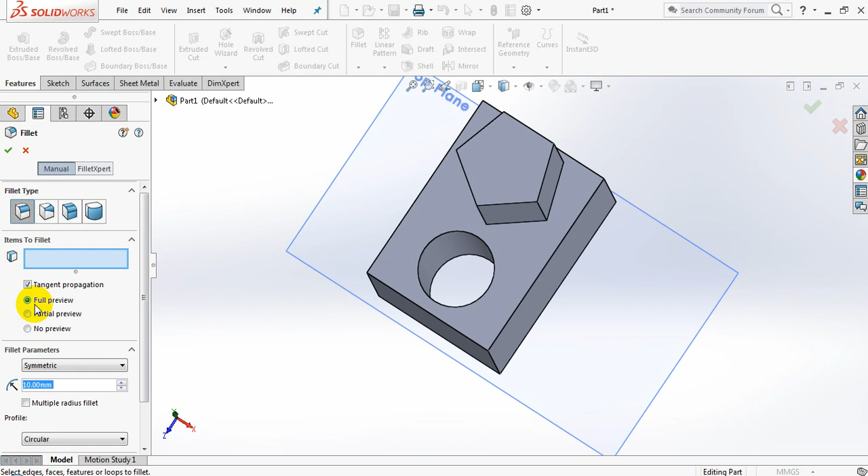Okay, I'd like to select full preview so I can see what my image is going to look like after the fillet. And let's see what this actually does. Items to fillet, you'll see that that is actually highlighted in blue. So let's go and select areas or lines to go fillet. I click on that line, you'll see it adds it to that list over there. It's edge 1. And you have a full preview of it as well.

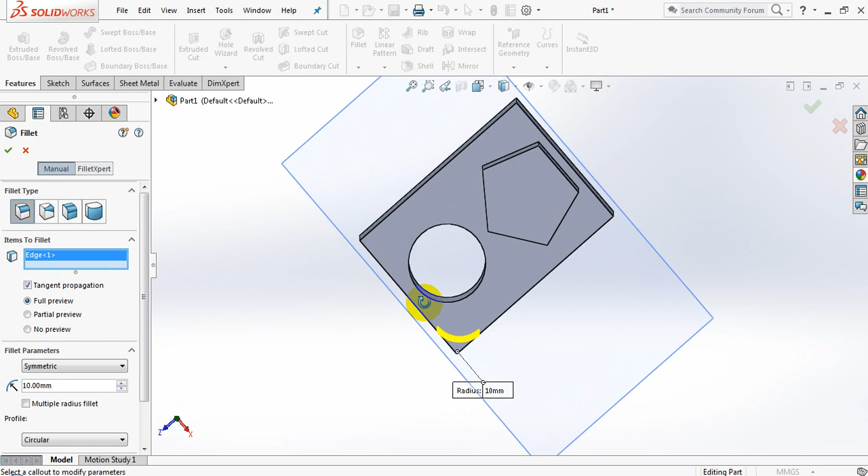Let's quickly swivel this around a bit. You'll see that it'll give you a preview of what it's going to cut off or fillet as such. Right, there it is there. I'm going to do this one as well. That corner there and this corner over here. Alright, so that's basic. If I'm happy with it, please note I've got all those edges lined up over here. I can do a partial preview, I can do no preview, or I can do a full preview.

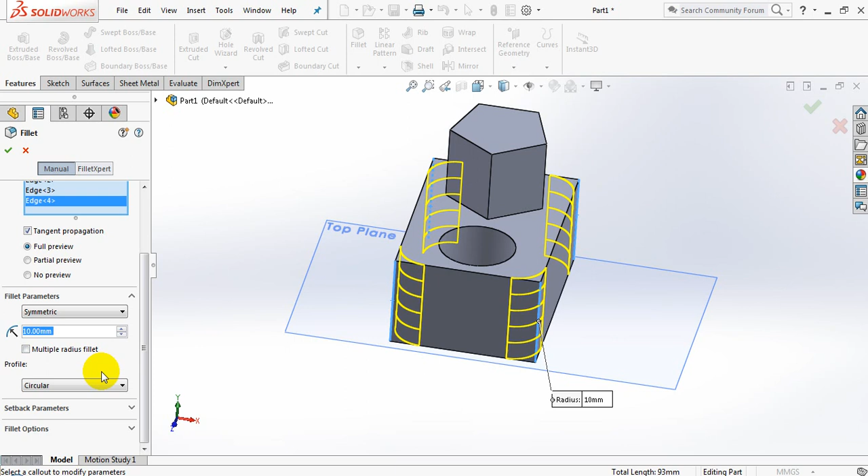In this case over here, I want a symmetric fillet parameter, or I could have an asymmetric fillet parameter, which means I can put two values in, and the same value won't apply to all four at the same time. So I'm going to just stick to my symmetric one, and I'm going to play around with 20, and you'll be able to see that it increases the size of the fillet. Alright, let's try 15. That looks decent.

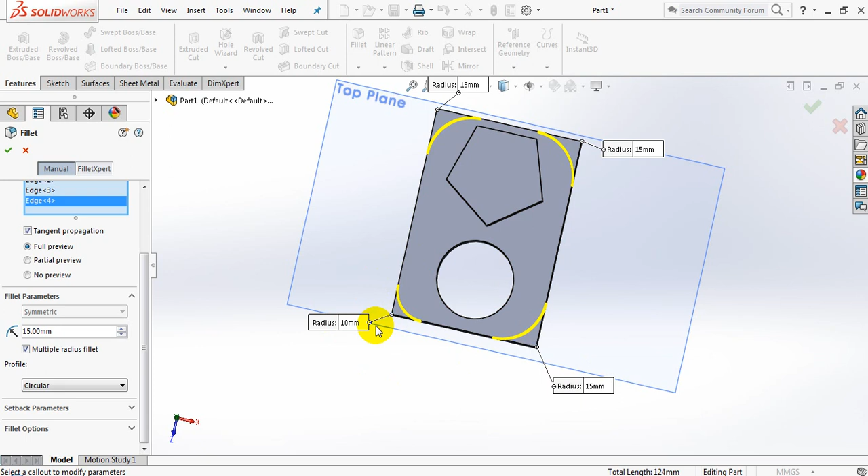I've got multiple radius fillet I can choose, and I can go ahead and edit this one at a time. Okay, I can make them separate sizes. So if I make this one 10, you'll see it'll be the only one that is 10, but I don't really want that. Okay, when I untick that, that jumps back into place. Okay, so I'm happy with that.

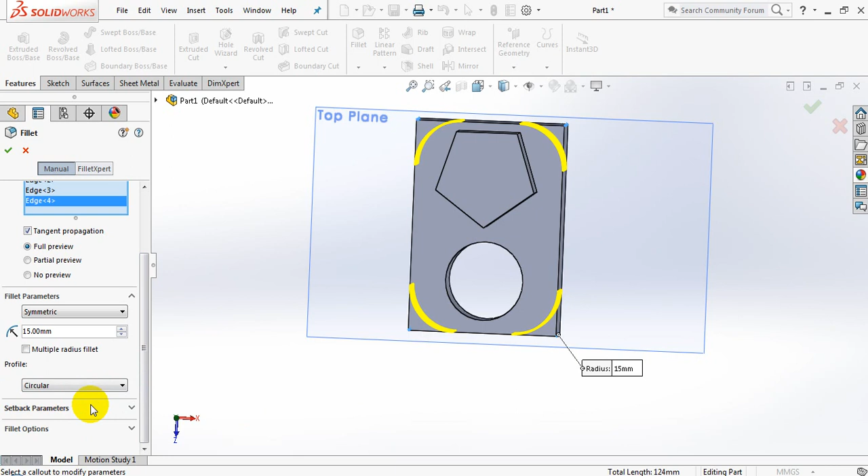They don't have to be circular, so let's just see from the top yet again. If I change this to conic rho, you'll see how it changes, and I'll be able to go and change the actual parameters of that as well. I can go ahead with conic radius. Yet again, I can change the radius of that, and curvature continuous. I can go and select that as well, but I'm going to stick with circular. Alright, let's select OK. And straight away it edits my actual shape.

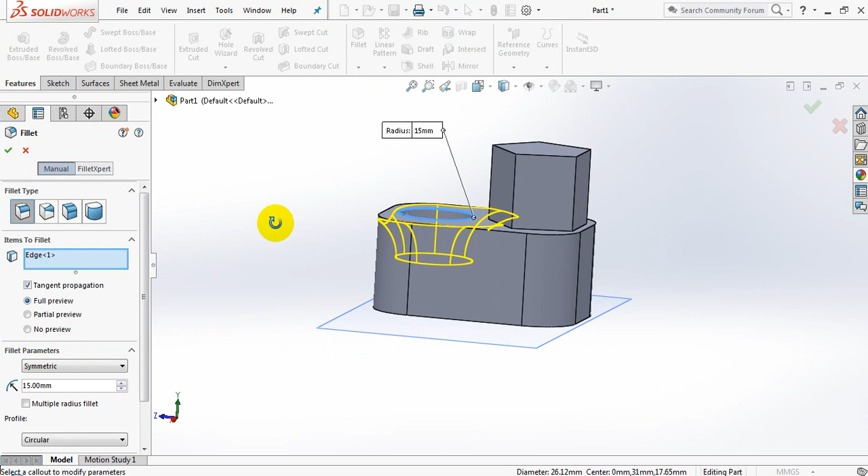Alright, I would also like to quickly show you this one over here. If I selected this profile, I want to go click on fillet. Remember, it has to be highlighted in blue. Automatically it goes and gives me a nice little presentation of what it would look like, and if I do like it, I'm going to go and click on the green tick, and it's going to fillet those edges for me.

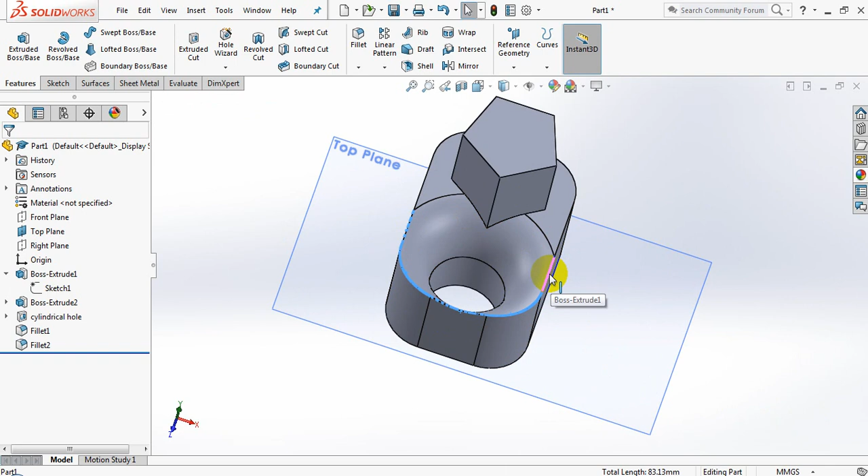Remember, in this case over here, it would have actually created more edges for me, so I might have to go ahead and hold in the control button and select all the edges that I would like to smoothen off a little bit, because it looks a little bit too rough. So I'm going to put about a 3mm. You'll notice that I've got 15mm still here and it hasn't given me a preview. Well, let's go and do a 3mm and see what it does.

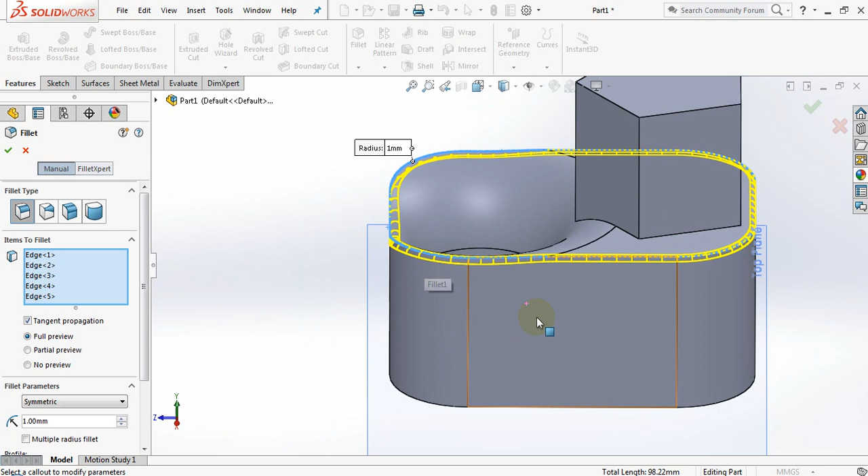3mm, no, it didn't like it. Let's try 1mm. There we go. Alright, so now it gives me a preview. When it starts giving me a preview, I know that it's possible to actually fillet. Alright, so I'm going to smoothen those edges a little bit. Okay. Alright guys, I think you guys have learned something about filleting, and I'm going to call it for step number 5.